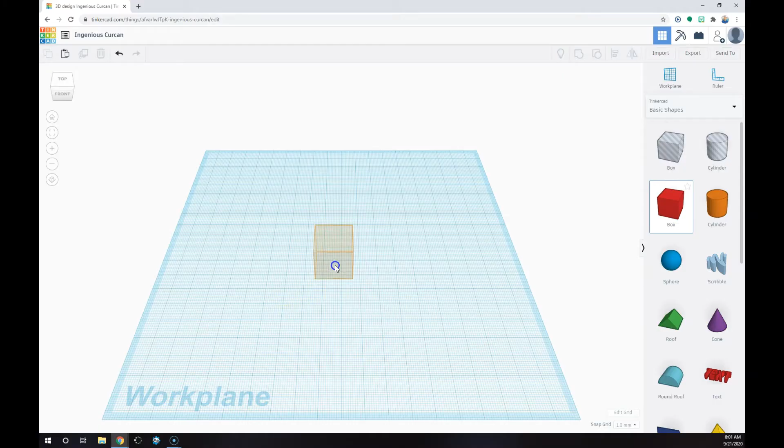I'm going to start by clicking and dragging a box to the center of my work plane. The box was found under Basic Shapes on the far right here.

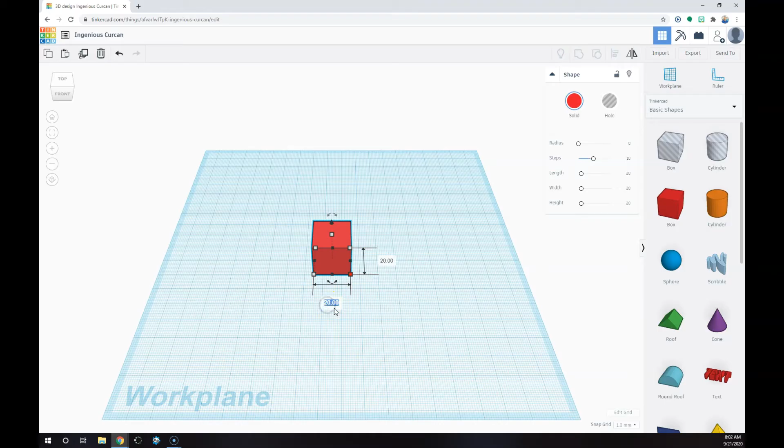Notice when I click on the box, I can see those 5 points. When I don't click on the box, they go away. I want to click on one of those points so I can resize my box. I'm going to change the bottom one to about 80, let's change this right one, it can stay 20, and the top one here I'm going to click on and change that to 6.

So now we have what's going to be the foundation of my keychain.

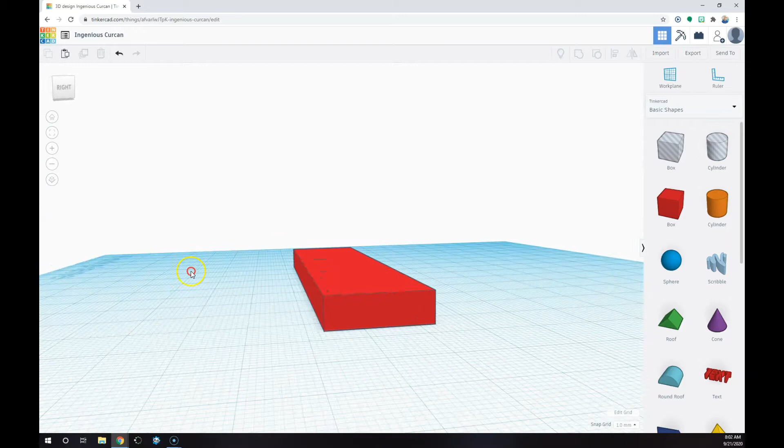I'm using right click on my mouse to rotate left and right. You can also use a 2-finger click and drag on a laptop or a Chromebook, so there's a few ways you can do that. Now to go back to that original view, I simply click home on the left here, and that should bring us back to this home view.

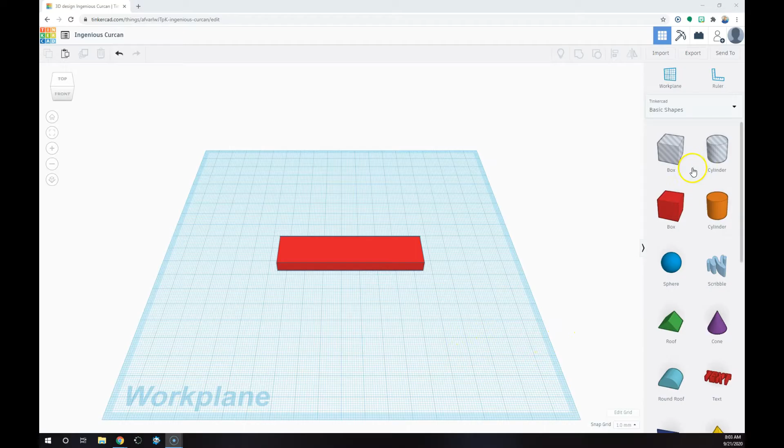Next, let's go ahead and grab some text. So from the far right here under Basic Shapes is text. I'm going to click and drag and just place it right underneath my keychain. And instead of text, I want it to say PTLW.

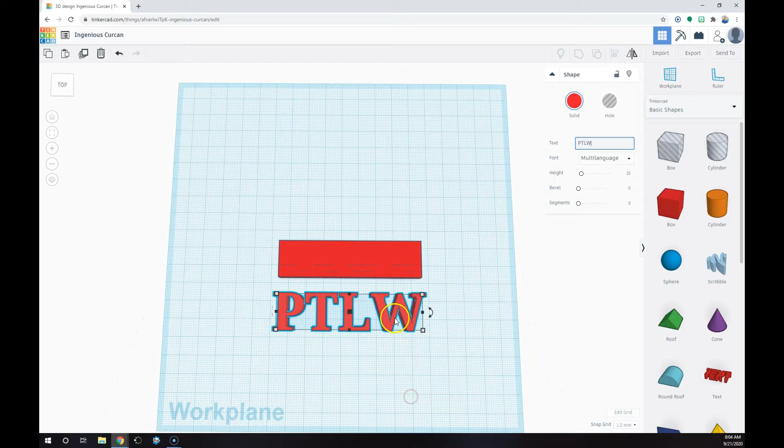I'm going to use right click to get a top view here. Notice that my letters here are far greater than my box, so I'm going to resize, proportion will lead the way.

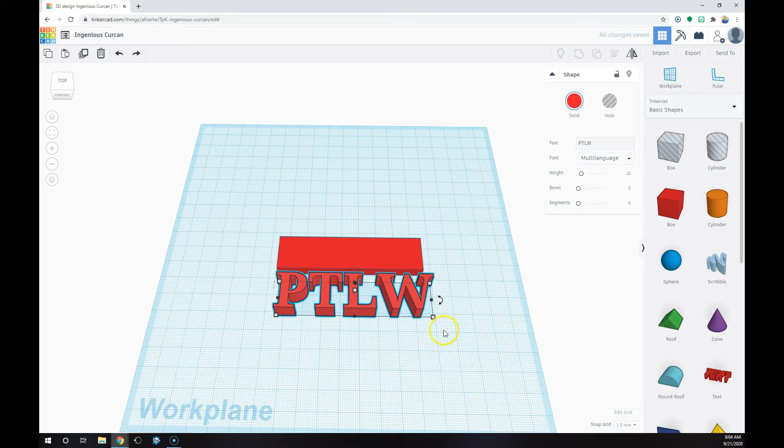But when I do that, I have to be careful that I'm holding shift, because if I'm not, here's what happens - it doesn't change proportionally. I'm going to hit Control Z to go back. But if I hold shift, it'll change proportionally my length, width, and height.

So I'm going to make it to where it looks like it'll fit. That looks about right. But here's a problem with that.

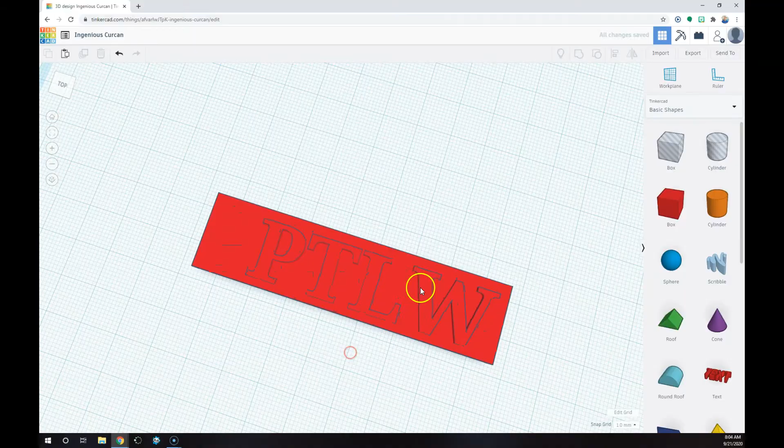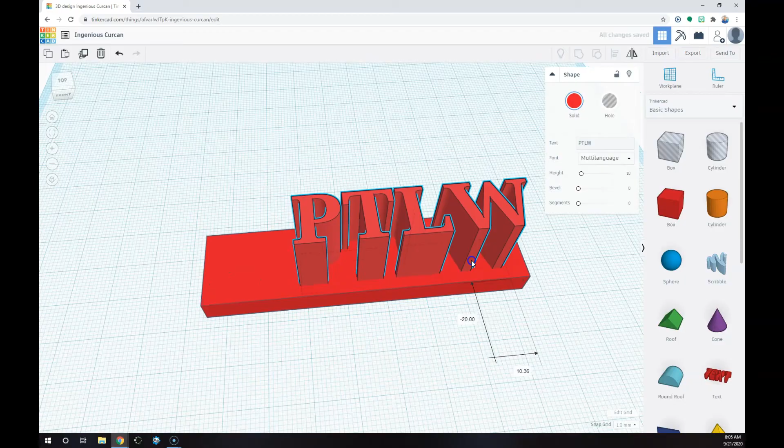Sometimes you'll lose your letters, your text. The reason you lose them is that when you resize, they get lost inside. So something I like to teach is just make it look weird, bigger like that. That way when you resize it length and width wise to where you want it, it'll always stick out, and then you can easily just resize this top.

I'm going to make it 10, and that should make it look pretty good. I'm actually going to make my letters a little bit bigger here, so I'm going to hold shift and drag, get a top view by right clicking, and that looks about right.

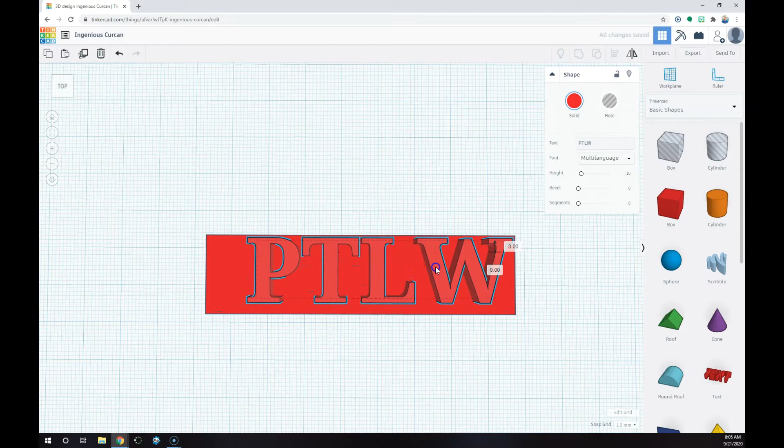You can center this if you'd like, and I can show you how to do that now. If I click and drag to highlight both, top right here is align. When you click the alignment tool, you'll see all these 1 through 9 points that you can align it to.

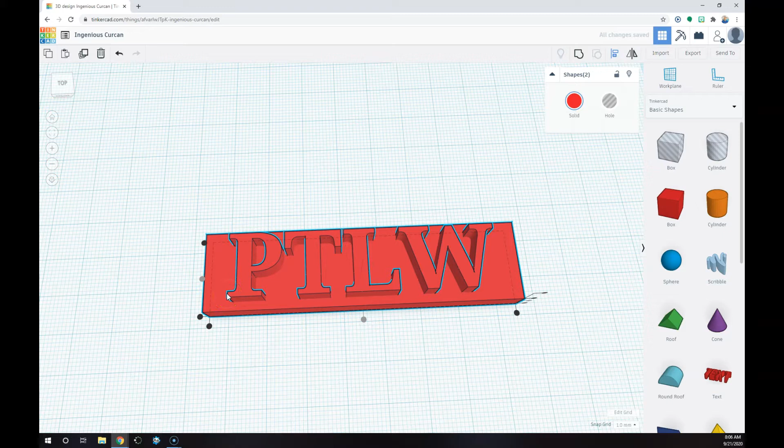So I'm going to make it center here, and that's all I really want. I don't want to center it here because I want to make it a keychain. So I'm going to go back, Control Z, and I'll keep it there.

Next, I need to change the size of my letters again, back to 10.

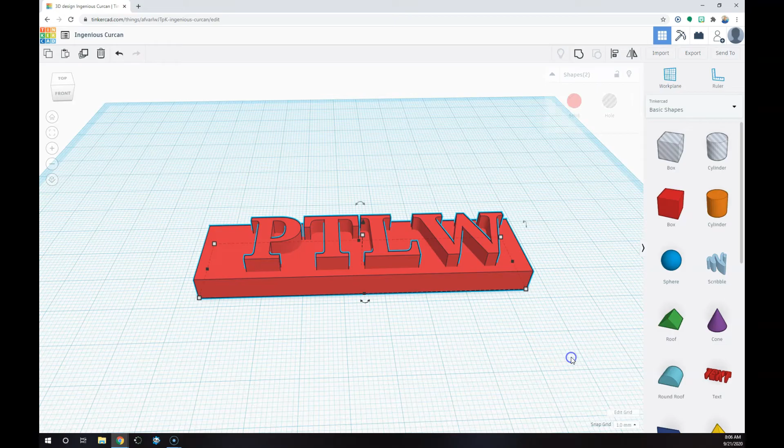Next, let's go ahead and group these two so it becomes one solid shape instead of 2 shapes. To do that, I will click and drag, select both, and here it says group, and now that becomes one solid shape instead of 2 shapes.

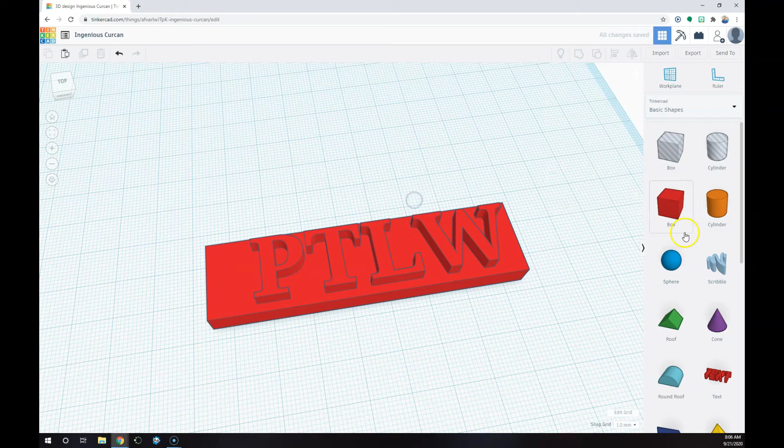Next, let's place a hole here so we can make this an actual keychain. To do that, I'm going to grab a cylinder, and notice it's a different color - that's because it's already a hole. You can make any shape a hole. For example, if I grab this solid box, I can change it to a hole. If I grab a cone, I can make that a hole too. So you can make any shape a hole, but I'm going to just use a cylinder since it's already ready to go.

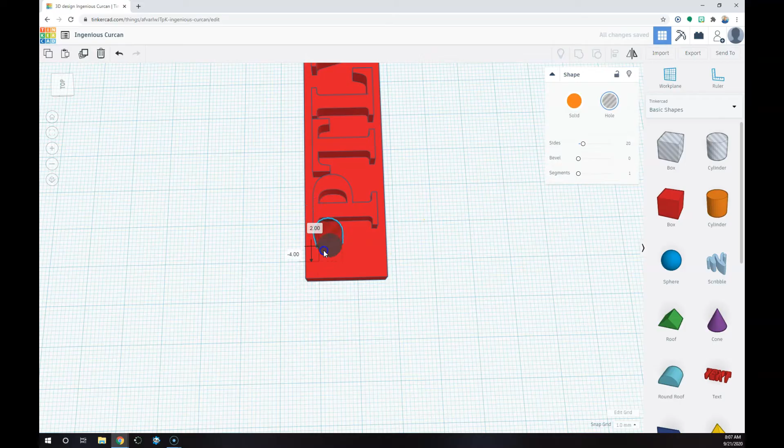I'm going to use right click to reposition my view here, and I want to keep this simple. Let's see what 6 by 6 looks like. Your height doesn't really matter because it's a hole anyway. But that looks like it could be a little bigger, so let me make it an 8 by 8. Then I'm going to position it - you don't want it too close to the edge, otherwise it'll break easily, but you also don't want it too far, because then the keychain won't really work. So that looks about right.

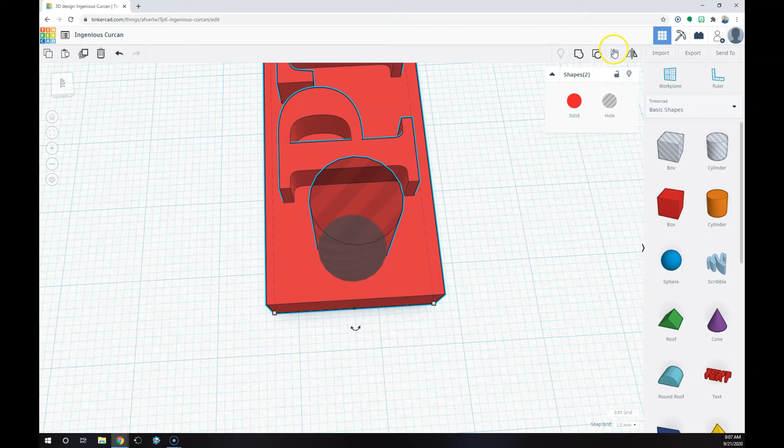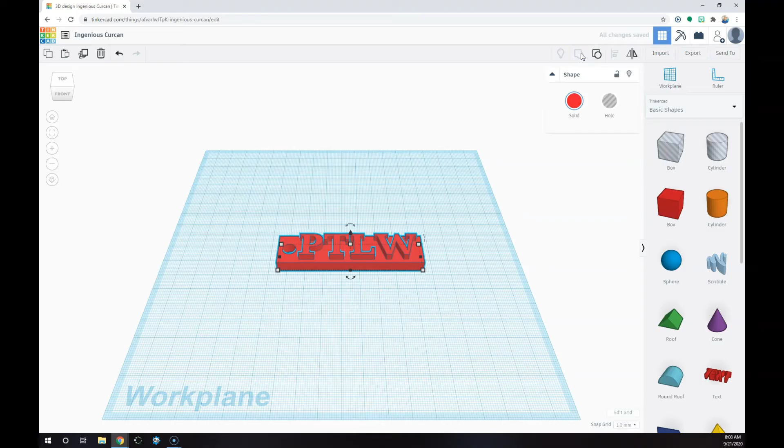Same way I aligned it before, I'm going to click and drag, select both, go to my alignment tool, and I want it centered. It looks like it's already centered, so that looks pretty good. Finally, I'm going to zoom out - I'll even go home here. Now that looks about right. I'm going to click and drag again and group. What's going to happen is it groups the hole with the base, and that's why I said the height didn't matter - now it went away, and there's my hole.

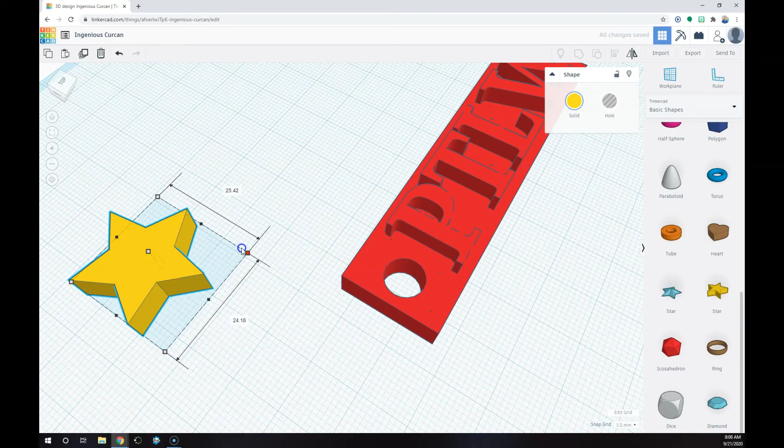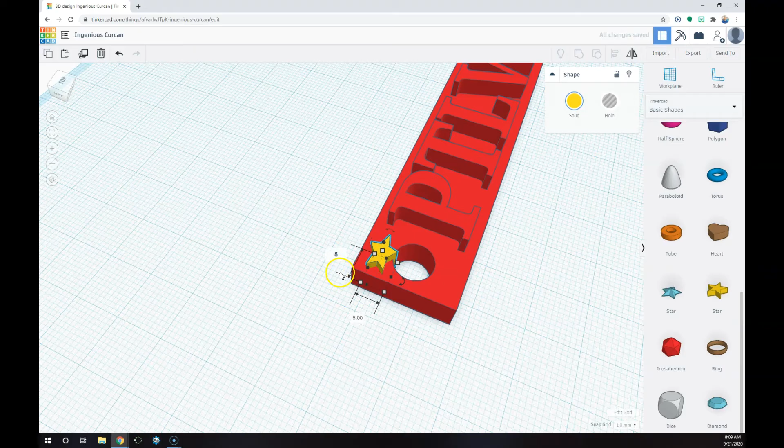The last thing I haven't talked about is decoration. If you wanted to add a few more things to this, for example maybe a little star, I'm going to hold shift as I resize the star to about 7 by 7. How does that look? I'm going to click and drag this top one here so I can see it. You can see that's still too big, so I'm going to make this 5 by 5, and we'll see what that looks like. Okay, 5, enter. That looks about right.

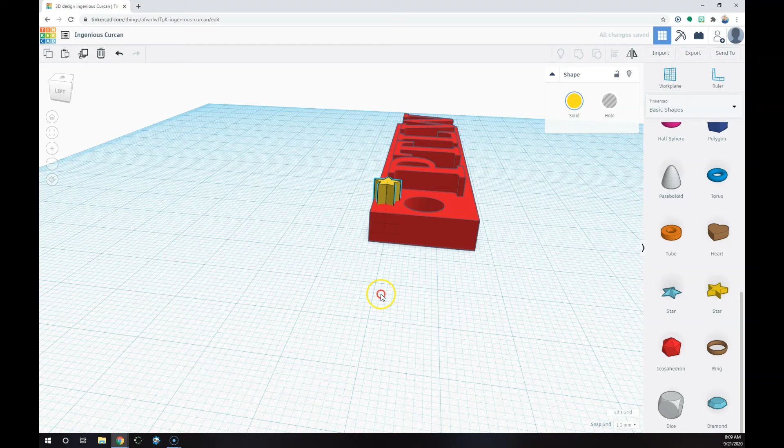Now I'm going to drag it just away from that hole, and that looks good. I'm going to make it the same height as my letters. I'm going to click on that top point once, and then change it to 10. And same thing, I'm going to group - highlight everything together and group it up.

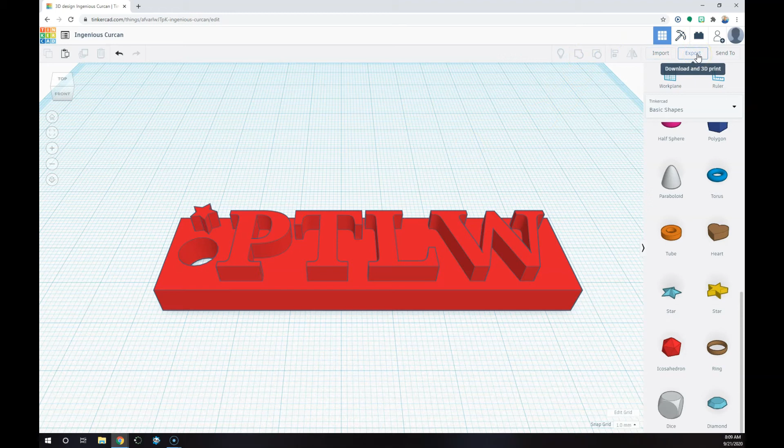Okay, so finally, the last thing I'm going to show you is how to send this to a printer. The way you do that is up here where it says export - it says download and 3D print. I'm going to export, and you're going to see a few different file types. The file type that most printers will use is an STL, but if it's not, you can simply ask whoever's helping you.

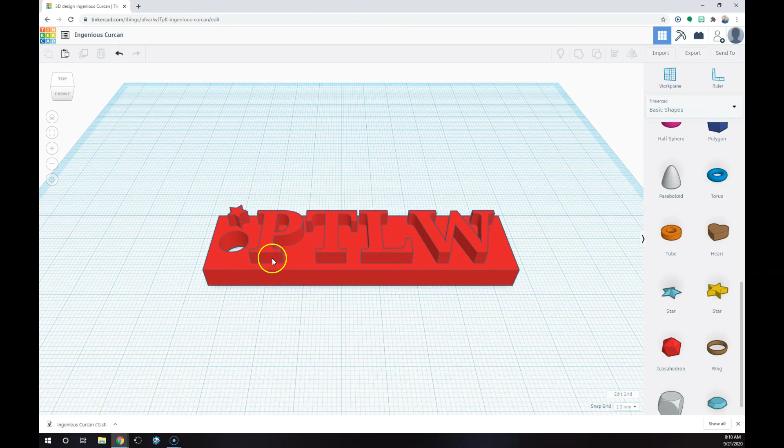Once I clicked on that, you see on the bottom left here it shows the file name. If you show in folder, this is the file you want to share with whoever is helping you print, whether it be via email or if you're submitting it online. Once you show this in folder, you'll see the file name, and that's the file you want to drag into whatever folder or method you're using to send it to whoever's printing it for you. Or if you're printing it yourself, you'll submit that file to your printing software. For example, I have MakerBot, so I'll send it to MakerBot Print, and then I'll be able to print from there.